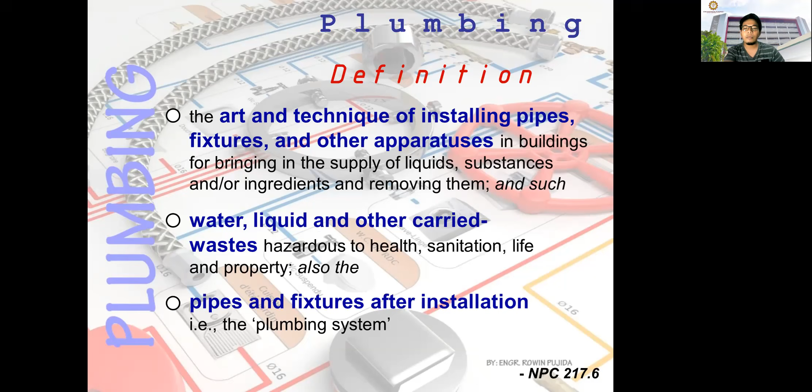Okay, the history of the plumbing system here in the Philippines: in 1902, the plumbing trade was duly recognized by the government in the city of Manila. Master plumber John F. Haas became the first chief of the Division of Plumbing Construction and Inspection. A plumbing code of the Philippines based on the plumbing code of the United States was incorporated into the building code for the city of Manila.

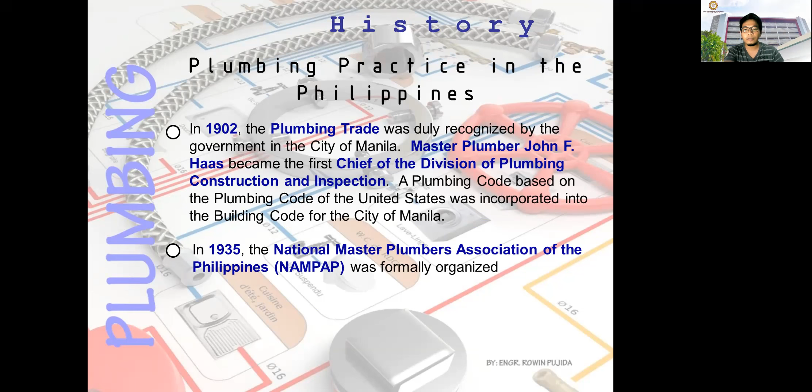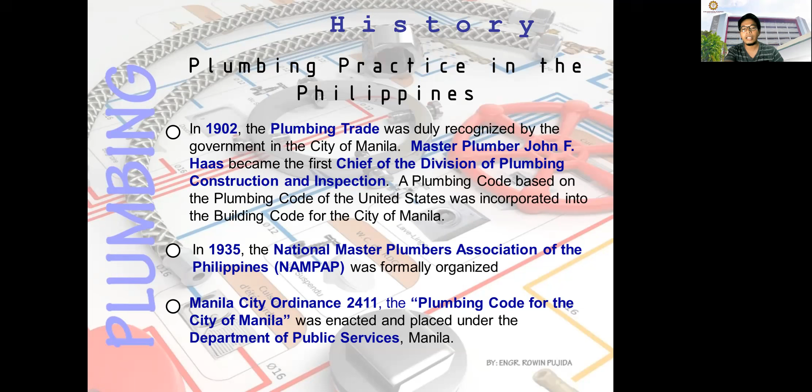And then in 1935, the National Master Plumbers Association of the Philippines, or NAMPAP, was formally organized. And Manila City Ordinance 2411, the plumbing code for the city of Manila, was enacted and placed under the Department of Public Services in Manila.

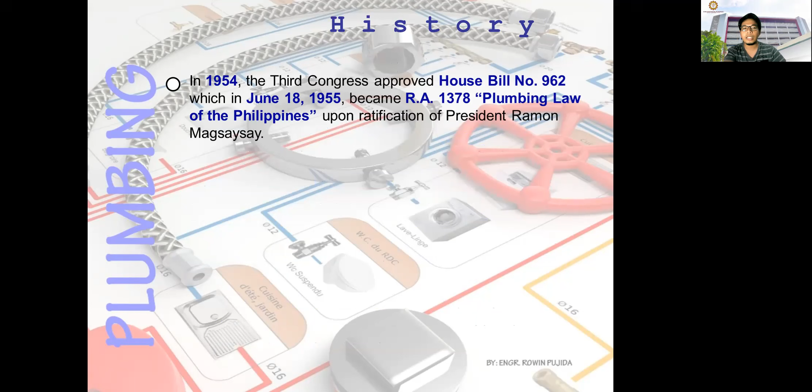Okay, and then in 1954, the Third Congress approved House Bill number 962, which on June 18, 1955 became Republic Act 1378, the plumbing law of the Philippines, upon the ratification of President Ramon Magsaysay.

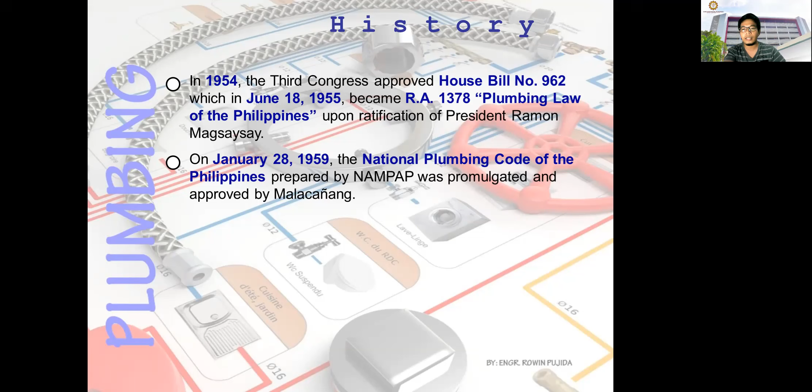And then on January 28, 1959, the National Plumbing Code of the Philippines, prepared by the NAMPAP, was promulgated and approved by Malacanang. And then before martial law, in 1972, Republic Act number 6541, otherwise known as the Building Code of the Philippines, was passed with the National Plumbing Code of 1959 as referral code in full text.

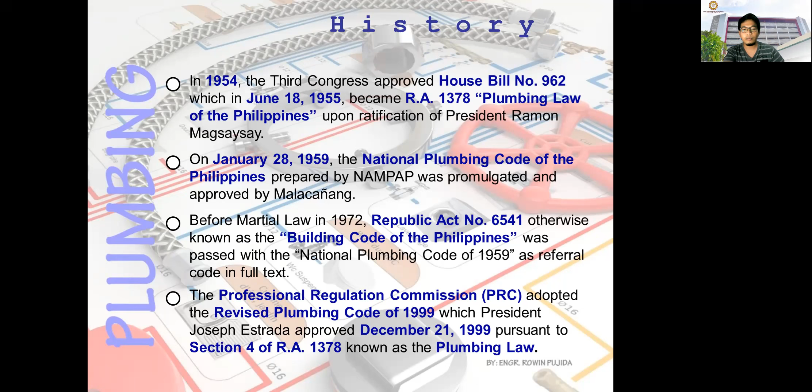So the PRC adopted the revised plumbing code of 1999, which President Joseph Estrada approved on December 21, 1999, pursuant to Section 4 of RA 1378, known as the Plumbing Law. Okay, and these are the 22 basic principles of the plumbing code.

So one, all premises intended for human use or habitation shall be provided with a supply of pure and wholesome water, neither connected to unsafe water supply nor subject to backflow or back siphonage. So all houses or buildings for human habitation should have at least a pure water supply.

And then for plumbing fixtures, basic principle number 2: plumbing fixtures, devices, and appurtenances shall be supplied with water in sufficient volume and pressure adequate to function satisfactorily and without undue noises. So there should be at least a minimum sufficient volume to be used in plumbing fixtures and devices.

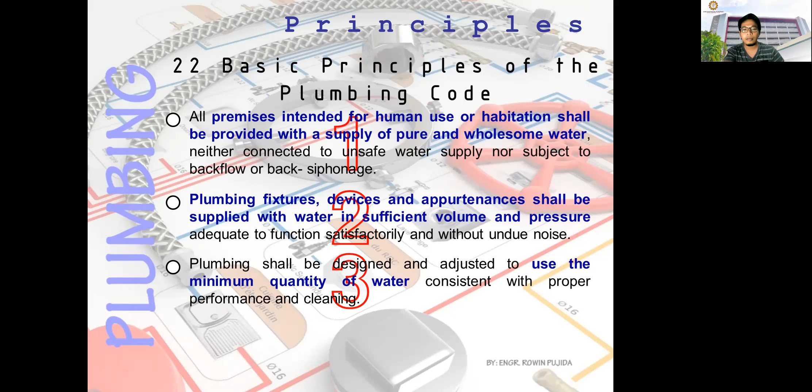Then number 3, plumbing shall be designed and adjusted to use the minimum quantity of water consistent with proper performance and cleaning. So there are plumbing devices that need sufficient water so that they can perform their total performance.

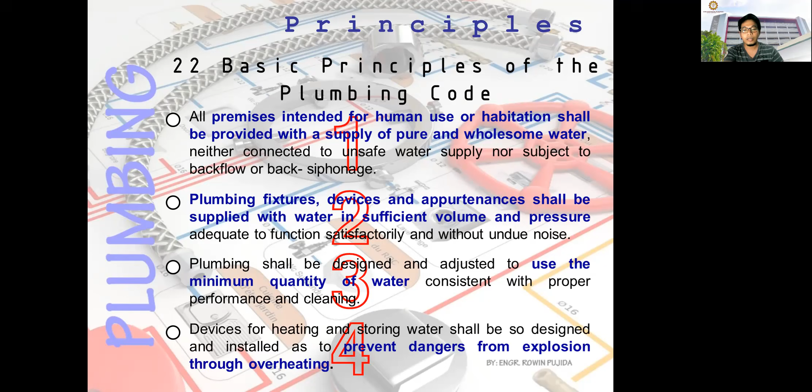And then number 4, devices for heating and storing water shall be designed and installed so as to prevent danger from explosion through overheating. So like what happened in Lebanon.

Then number 5, every building abutting on a street, alley, or easement with a public sewer shall connect its plumbing fixtures to the sewer line. So your plumbing fixtures should be connected to the public sewer.

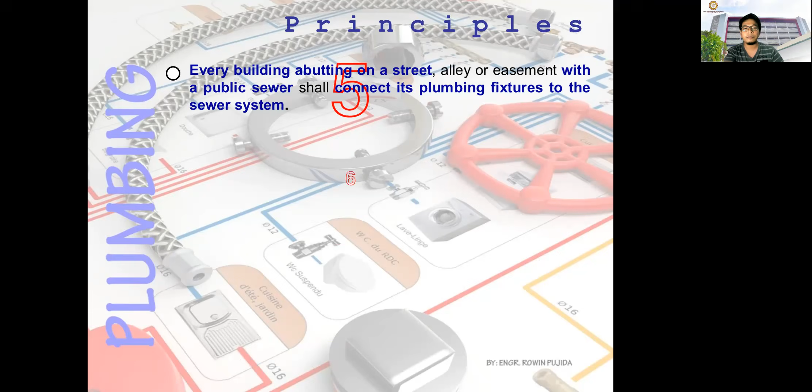And then number 6, each family dwelling unit shall have at least one water closet, one kitchen type sink, a lavatory, and a bathtub or shower to meet the basic requirements of sanitation and personal hygiene. So it is a must. If you have a building, you should have at least one water closet and maybe a shower.

Okay. And for number 7, plumbing fixtures shall be made of smooth, non-absorbent materials free from concealed fouling surfaces and shall be located in well-ventilated enclosures. So your toilet and bathroom should have minimum ventilation. It should have at least 10% ventilation, 10% of the area.

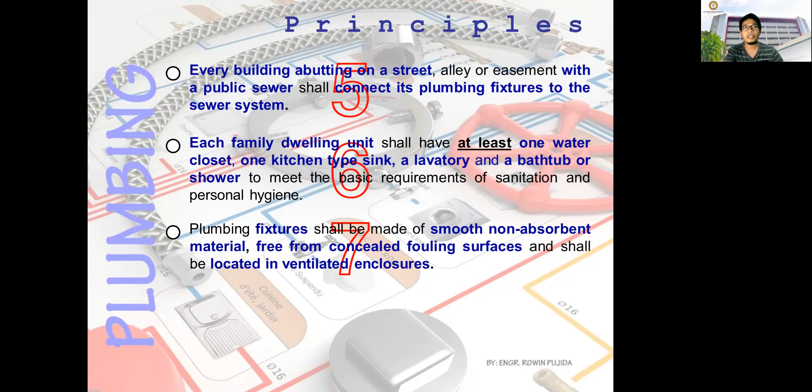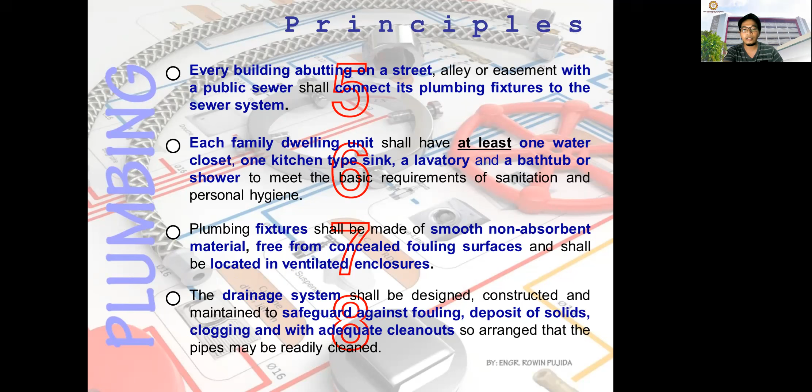And then the drainage system shall be designed, constructed, and maintained to safeguard against fouling, deposit of solids, clogging, and with adequate clean outs to arrange that the pipes may be readily cleaned. So based on the National Plumbing Code, if you have longer pipes, you should put a clean out at least every 15 meters. Okay. So maybe we'll discuss further what is a clean out in our next topics, which is the fittings.

And then number 9, all piping shall be of durable NAMPAP approved materials, free from defective workmanship, designed and constructed by the registered master plumber to ensure satisfactory services. So the piping you use during the installation should be approved by the master plumber.

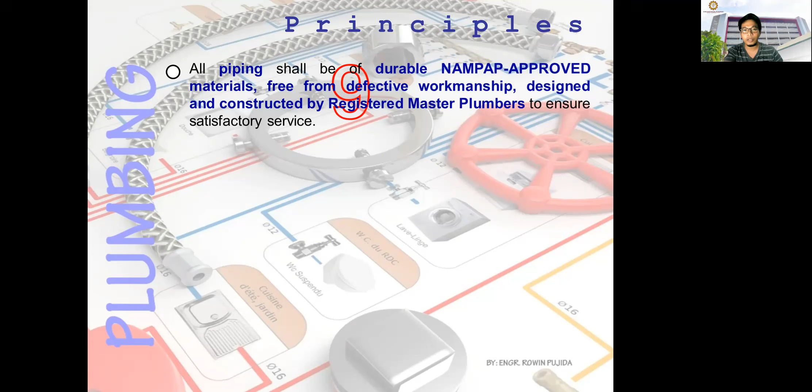Okay. And then number 10, each fixture directly connected to the drainage system shall be equipped with a water seal trap, since all fixtures shall have a P-trap, so that you have the water seal trap. So maybe I will discuss that also in our future topics. You have the water seal trap. It is provided in our P-traps in fittings.

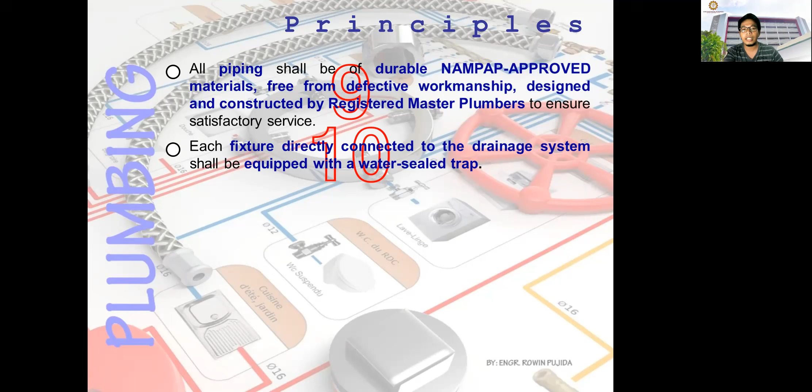Then number 11, the drainage piping system shall be designed to provide adequate circulation of air, free from siphonage, aspiration, or forcing of trap seal under ordinary use. So the drainage pipe should have at least ventilation. No? So there are designs on how to install vent systems in our piping system.

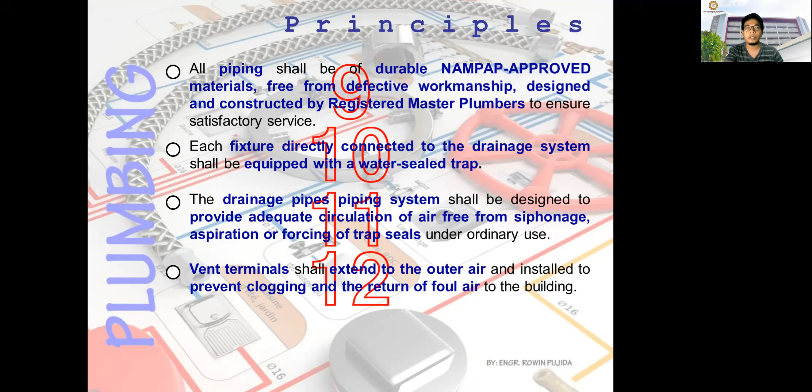Okay. Then number 12, vent terminals shall extend to the outer air. So it is called the vent through roof, and installed to prevent clogging and the return of foul air to the building. In some cases, there are also devices used in replacement of the ventilation system. No? So an example of these is the Studor.

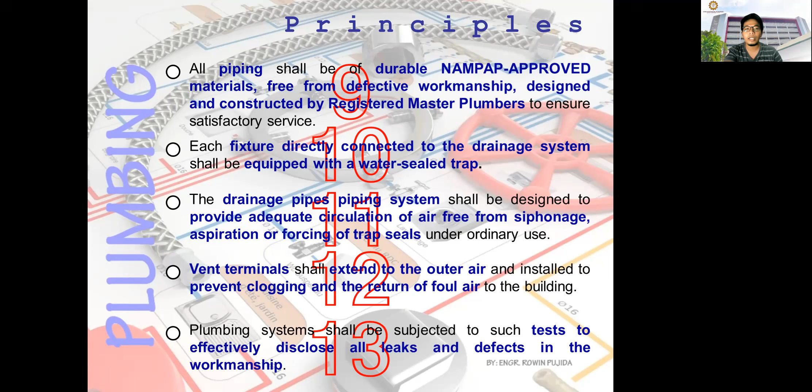And then number 13, plumbing system shall be subjected to such test to effectively disclose all leaks and defects in the workmanship. So there are two types of tests performed here in the Philippines. You have the water test and the air test. Okay.

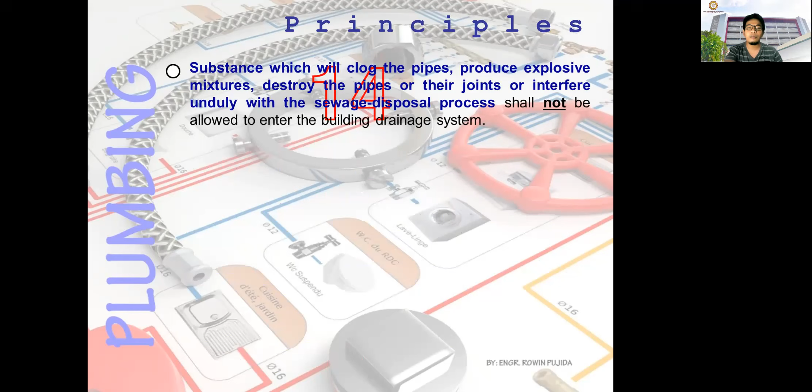Number 14, substances which will clog the pipes, produce explosive mixtures, destroy the pipes and their joints, or interfere unduly with the sewage disposal process, shall not be allowed to enter the building drainage system. Okay, so like sanitary napkins, no? They should not be allowed to enter the drainage system.

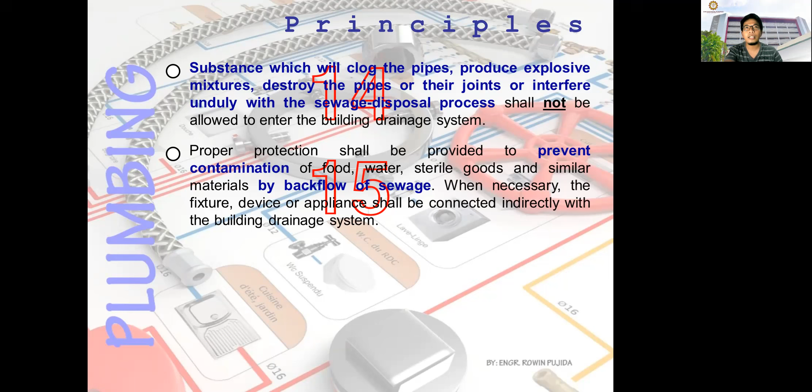And then number 15, proper protection shall be provided to prevent contamination of food, water, sterile goods, and similar materials by backflow of sewage. So there are other fittings called check valves so that the backflow of water can be prevented.

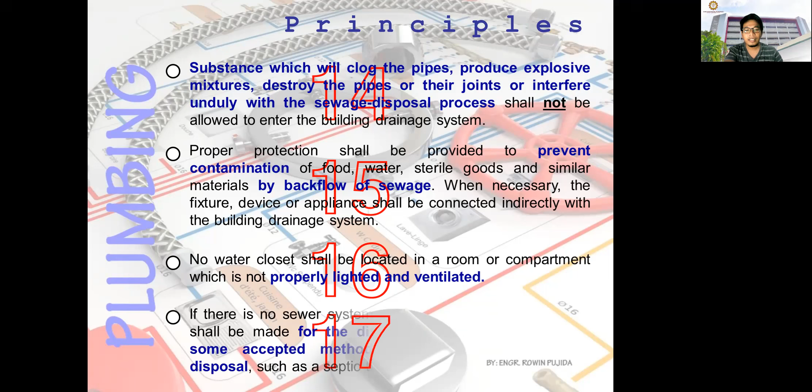Okay. And then number 17, if there is no sewer system in the area, suitable provision shall be made for the disposal of building sewage by some accepted method of sewage treatment and disposal such as septic tank. So in building construction now, it is required to have a septic tank, and for our sewage treatment, after the septic tank, we will have a seepage pit. Okay.

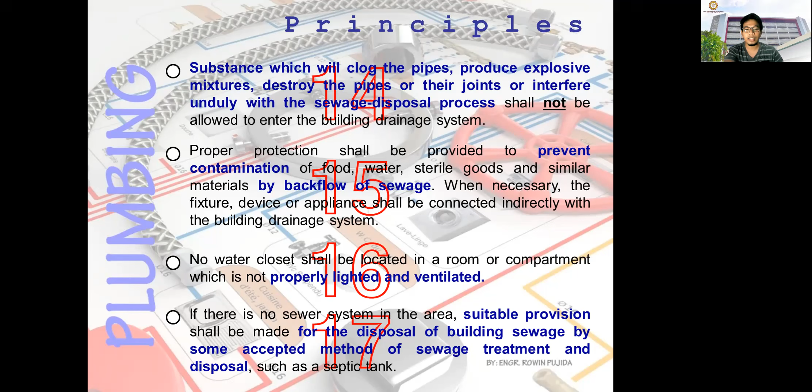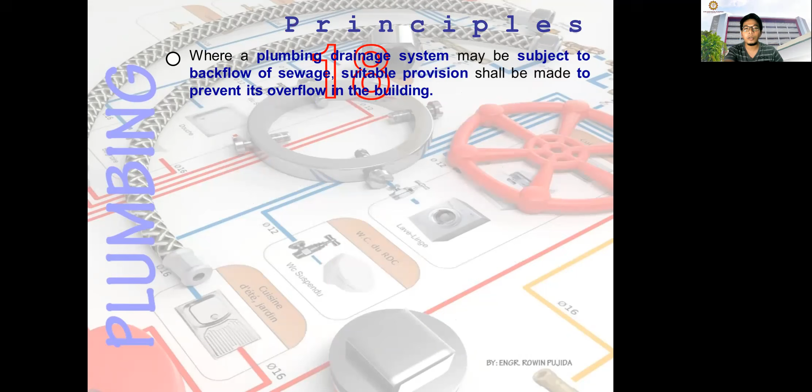And then number 18, where a plumbing drainage system may be subjected to backflow of sewage, suitable provision shall be made to prevent its overflow in the building.

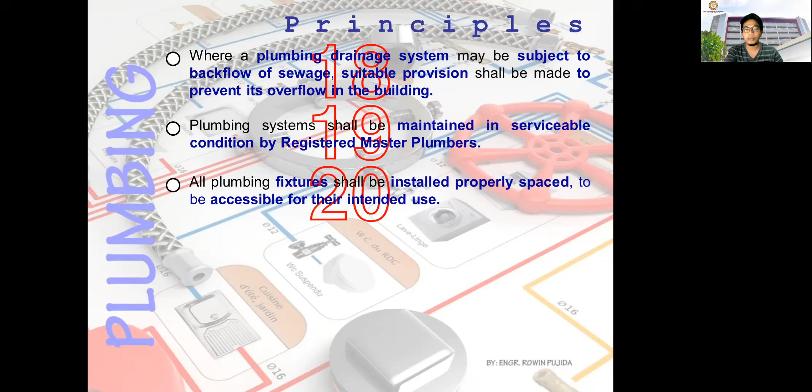Then number 21, plumbing shall be installed with due regard to the preservation of the strength of structural members and the prevention of damage to walls and other surfaces through fixture usage. So there are some plumbers that install their pipes embedded in structural members like columns and beams. So you should cooperate with the structural engineers or civil engineers so that you do not damage the structural members of that particular building.

Okay, and then number 22, the last basic principle of plumbing. Sewage or other waste from a plumbing system which may be deleterious to surface or subsurface water shall not be discharged into the ground or into any waterways unless first rendered innocuous through subjection to some acceptable form of treatment. So for sewage waste, it should flow to your septic tank, and then the waste there should be collected, not discharged in waterways or any other areas.

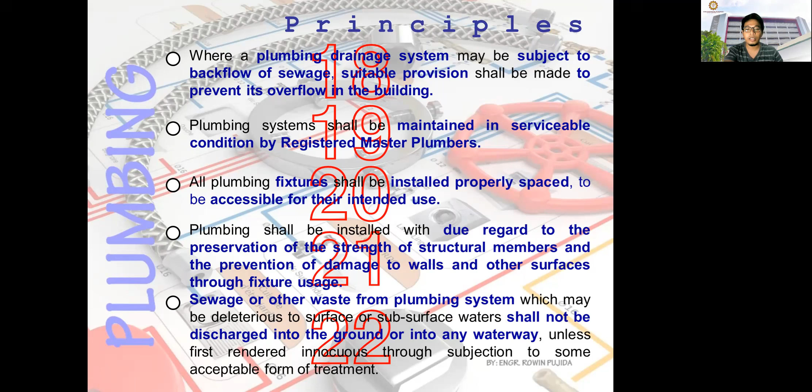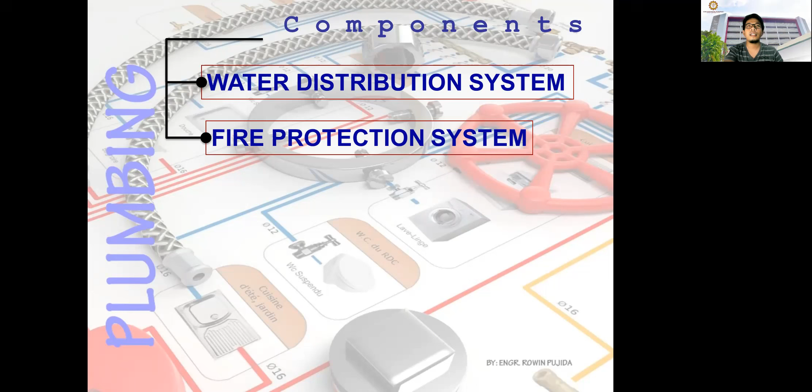Okay. And then let's have the components of plumbing. First is the water distribution system. You have the potable water. Next is the fire protection system. You can have the fire sprinkler system or the fire hydrant, and also the standpipes. That is for the fire protection system. And then the plumbing fixtures, for example, the water closet, the lavatory, the bathtub. And then the sanitary drainage, you have the waste line coming from your lavatory and from your shower.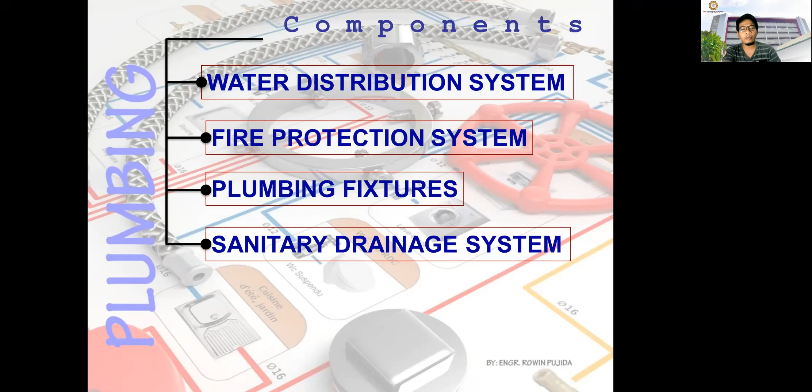And then the storm drainage system, that is from your roof to gutter to leader, and then to your downspout. Okay, so that is the storm drainage system. And the flow, you have from the roof, then to your gutter, then to downspout, and to the catch basin. Okay, that is the flow for the storm drainage, and the other is the fuel gas piping system.

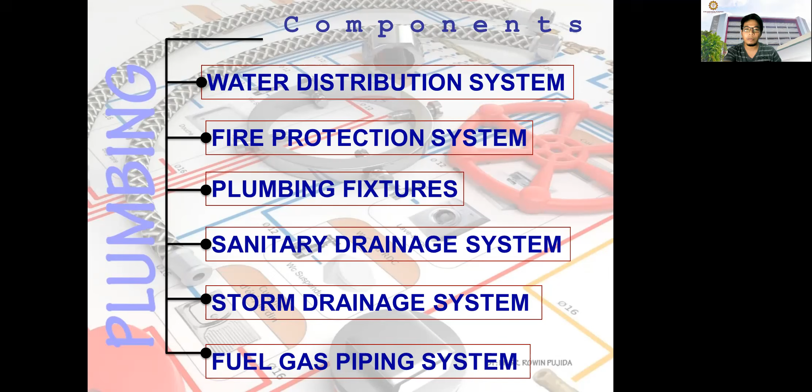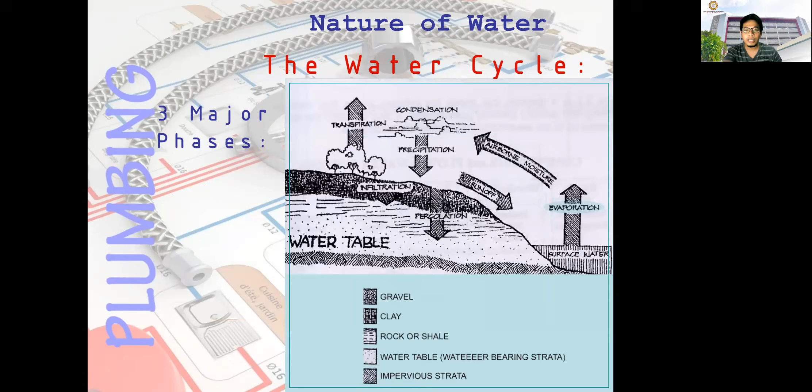Okay, for the nature of water, you have there the water cycle. So you already know the water cycle. There are three major phases of the water cycle. Namely, you have the evaporation, then the condensation, and lastly the precipitation, so the rain. And then after the precipitation, you have the infiltration of the rain. You have the percolation and the subsurface runoff. Okay.

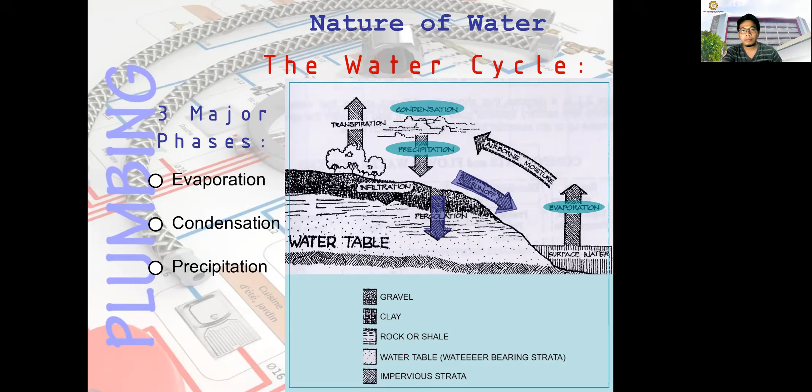And then the plumbing cycle. So the components and flow in a water system. The first is the source. You have lakes or rivers or the reservoir, like in Mananga, here in Buhisan, that is an example of a reservoir. And then to the supply, so you have the water main, and then storage tanks. And then for the distribution, you have the piping networks and the pressure pipes. Then after that, you have the usage in your building through plumbing fixtures.

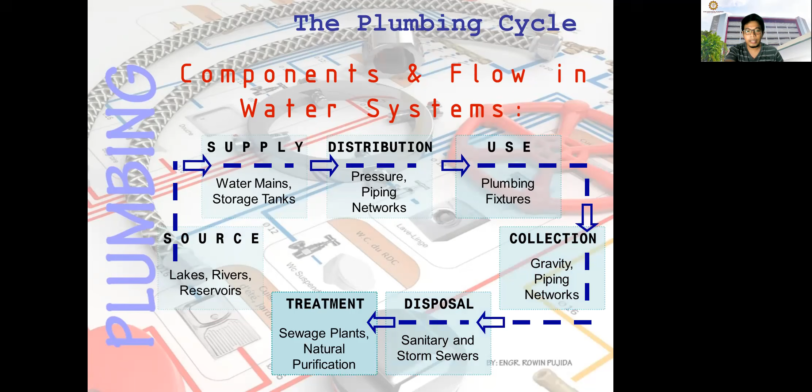And then the collection, you can have it by gravity or in piping networks. And then the disposal, coming from the plumbing fixture, you have the sanitary or the storm drainage or sewers. And then from the disposal, there are areas that have water treatment plants. So you have the sewage treatment plants or the natural purification, like for example the reed bed, and it goes back to the source.

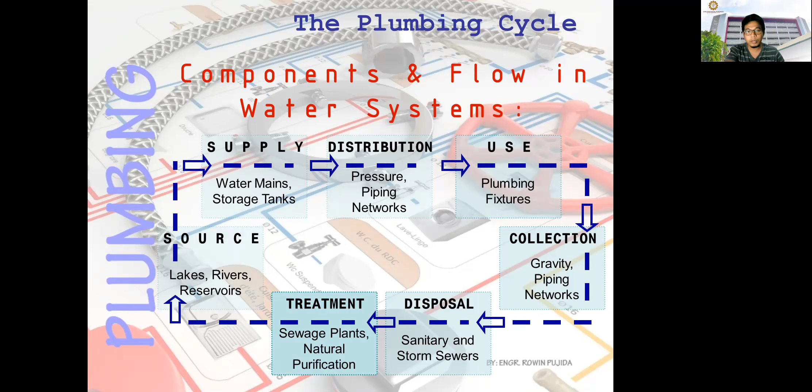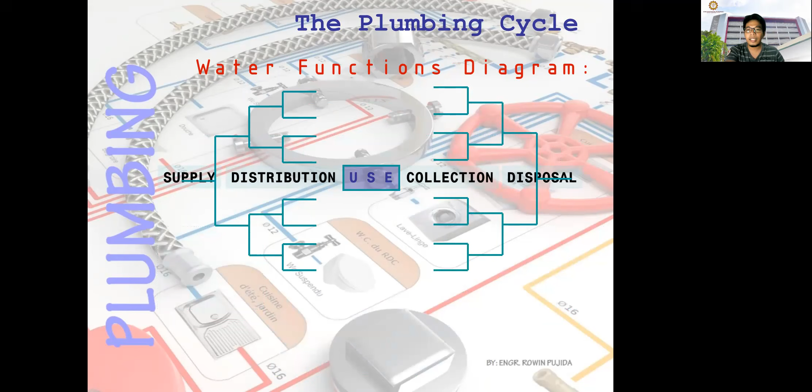Okay, and then you have here the water function diagram. So you have the supply, then you distribute it to the buildings and other houses, and then they use the water. For the collection, you have the sewer lines and the drainage lines. After that, you have the disposal. So the flow of water and water-carried waste should always be only in one direction, from supply to disposal. And the two sides should always be carefully separated from each other, since from supply, this is potable. After the use, it is disposal.